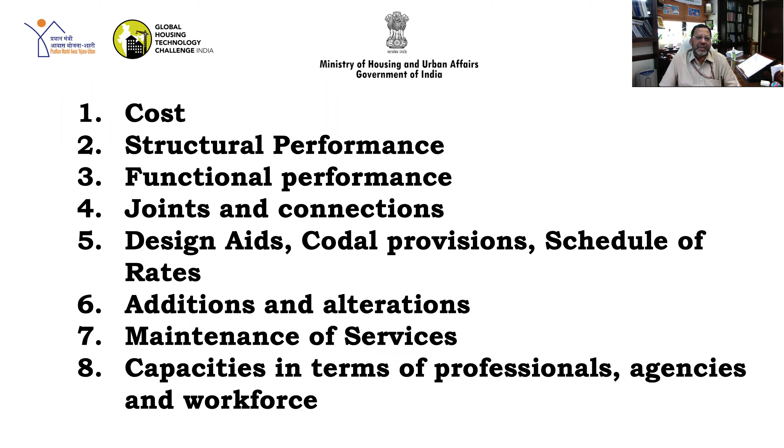But before that, let me just tell you the Lighthouse project at Lucknow is being implemented with 1040 houses in S plus 13 configuration, and the technology used is a hybrid one, where steel structural frame with stay-in-place PVC wall form system is being used. The plot area is 20,000 square meter and the total project cost is 130.90 crores.

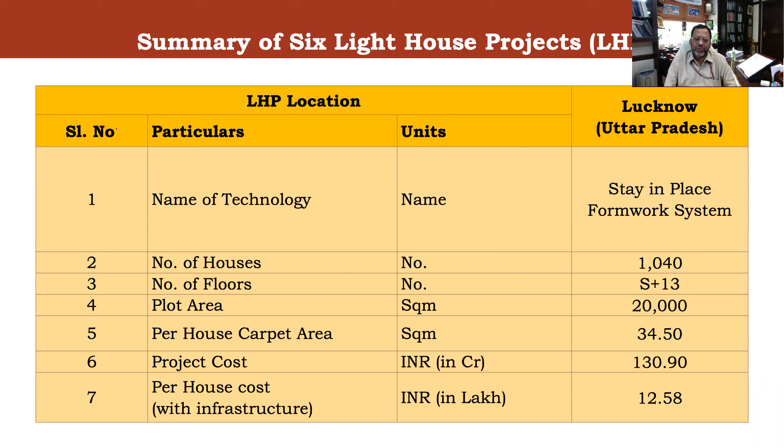The question about cost, because we are using steel structural system plus PVC wall form, naturally comes into mind whether the cost here is cheaper than the conventional cost of construction. And when we are saying the conventional cost of construction, it means if the same thing is done with cast in situ RCC frame construction and brick infill walls.

So if I have to give you the tendered cost, the LHP at Lucknow was awarded at per flat cost, including infrastructure, at rupees 12.58 lakh. And if we compare it with conventional technologies cost, it is 15.38 lakh. So with conventional, it comes to 15, and here we are getting around 13 lakhs, which is 18% cheaper than the conventional cost.

Besides that, the technology being used is fast, cost effective, makes use of less energy, environment friendly, resource efficient, and waste is minimized. It is sustainable as well, and you have a clean dust-free site, because it is a drywall construction kind of thing.

Now at the same time, let me also tell you that cost depends on a number of factors, such as the size of the project, location, geoclimatic region, the foundation, means soil strata. If it is black cotton soil, naturally you have to invest more on foundation. Then availability of materials: if you have a factory nearby of PVC wall form or any drywall, then the cost may come down, because you will cut down the transportation cost and other things. Accessibility of site is also very important.

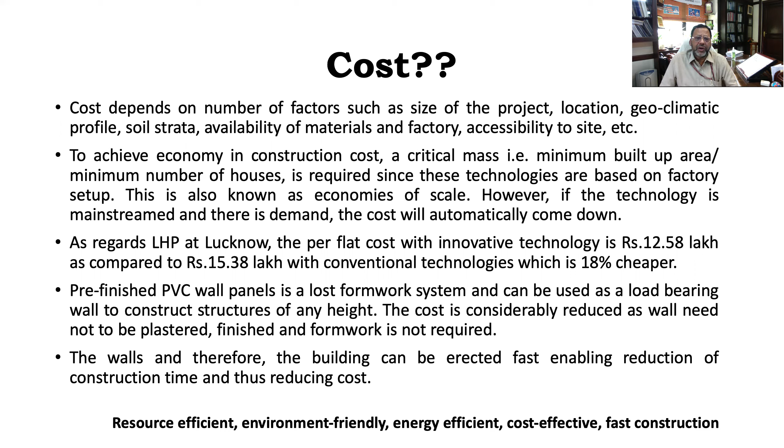So these are the advantages, and as per this project, the cost is 18% cheaper. Also, this technology is resource efficient and environment friendly. Next question that comes to mind is the structural performance, because we are using innovative construction technology, and the RCC frame construction is time-tested, proven. Let me also tell you that PVC wall form is a proven, demonstrable technology elsewhere in the world.

And so here also its structural performance is superior to the conventional construction, because these panels are made in the factory, and then later you can fill it up depending upon your structural requirement. You can fill it up with lightweight concrete or normal concrete. This will ensure desired structural performance. Because you are filling it with concrete and then connecting it with the boundary elements, you get better structural performance. Also, PVC wall forms are tested and proven for flexure, shear, and other loads.

As I told you, these are designed as per your requirement. So depending upon the project requirement and the loads coming, these PVC wall panels can be designed and later manufactured. The thickness you require, the cut length you require, the width you require, all those can be decided based on your structural design. Other advantages are better structural strength, as I told you. It can take flexure as well as shear load. Durability: they are durable because they are made in the factory.

Ease of construction. This formwork being a rigid PVC component, it does not corrode, it does not chip, it cannot be stained, and it is resistant to UV, bacteria, and fungi, thus ensuring long life of the structure. If we compare the life, the PVC wall form life as claimed by the manufacturers is 50 years. Also, it is very useful as a wall panel in coastal areas.

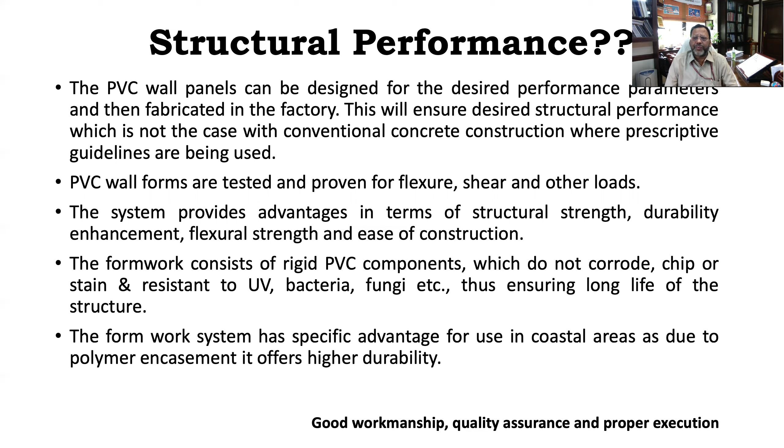That is one thing. Secondly, good workmanship and quality assurance. Although you will get all the panels tested from the factory, when you start erecting them and aligning them, you need to do it as per specification with good workmanship and assure the quality as well. These three things are important for superior structural performance. Next question comes about the functional performance. So as I told you in the last slide, in between it's hollow.

PVC wall panel of 100 mm or 160 or 150 mm, depending upon your application, is hollow, and that hollow portion can be filled either by concrete or by lightweight concrete. In this project, we are filling it with lightweight concrete, and lightweight concrete doesn't have aggregates. It can be done with foam, or otherwise you can use cement, fly ash and aluminum powder to create foam. So voids are created. Those voids help in thermal insulation.

Because these panels are made in the factory, they have advantages in terms of durability and weather resistance. Another advantage: once you have thermally insulated walls, it will reduce the energy demand of your building. And once you reduce the energy demand of your building during its service life, the overall life cycle cost will be minimum. So that is also very important.

Another important thing is that it's a pre-finished wall. Pre-finished wall means that you get the wall from the factory as per your desired parameters. So whatever color you want, you can get those color options from the factory. So you don't require plaster, you don't require anything else, and these walls are aesthetically pleasing, with a top class finished surface in different color options. So that is another added advantage of these wall panels.

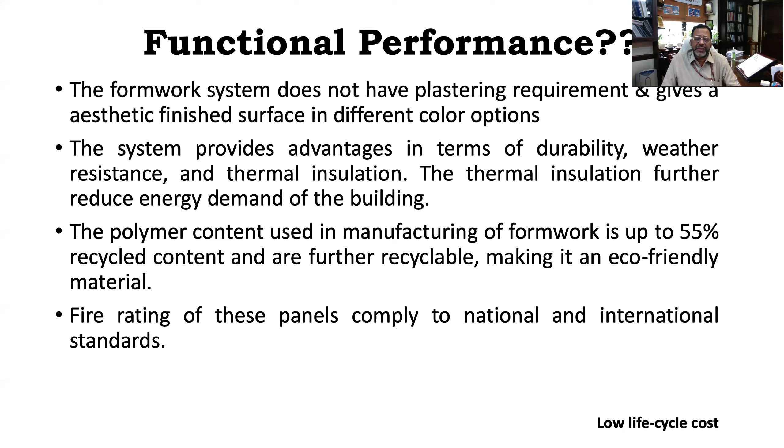Fire rating: as per the manufacturer certificates, the panels come in different fire ratings, 1.5 hours to 2 hours. And as I told you in other lectures as well, there is no compromise as regards fire rating. So fire rating of these panels needs to be as per national and international standards.

Joints and connections are pretty simple here, because wall panels can easily be connected by slide and lock arrangement. Secondly, once they are erected, they are hollow and have cavities, and through those cavities you put horizontal and vertical reinforcement. So all wall panels are connected with horizontal and vertical reinforcement, and later you fill it with concrete. So it acts as a monolithic shear wall, pre-finished with PVC skins on both faces. So it's a pre-finished shear wall construction. So that is the advantage.

So as far as the wall is concerned, it is good to transfer the load monolithically. Structural integrity of walls is achieved because of this kind of arrangement. Now, another thing is, how do we connect these walls with the existing structural system? It can be RCC or it can be a steel structural system. In our case, it is a steel structural system.

When you are using a steel structural system, all beams and columns can be connected through anchor bolts, plates, and dowel bars. If you are using RCC, then it is slightly simpler, because you can cast the concrete of beams, slab, and this together. In a steel structure system also, if we use a deck slab, then the concrete screed is cast with reinforcement going into the beams. So you can connect all the structural elements at the slab level, thereby ensuring rigid diaphragm action. And that rigid diaphragm action is very important for ensuring seismic resistance.

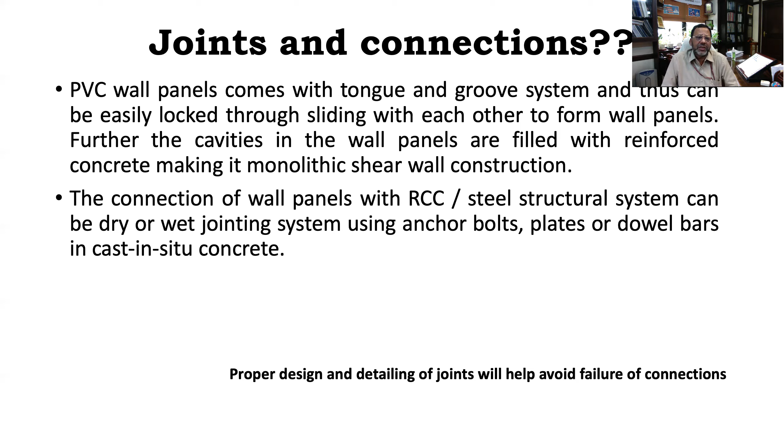The length of the joint, the dimensions of the plates, if you are using cleat, the dimensions of the cleat, then what should be the bearing, all those things need to be properly detailed so as to avoid failure of connection, because a poorly detailed strong connection will not help. Similarly, if you don't detail it properly and if you have designed it properly, that will also not help and lead to failures. So joints and connections, there are absolutely no problem when we are talking about PVC wall forms.

Design aids, if we talk about, these PVC wall forms can be easily modeled, because being a concrete wall, it can be easily modeled. Also, these innovative systems have their own software, so you can always use that software. But always remember that this software is not tailor-made for or synced with Indian standards. So you can put your parameters as per Indian standards, do the analysis, and then use any standard structural design package to design your walls and, of course, the structural system.

Remember that in absence of Indian standards, the international standards can always be referred, and it is being advocated by BIS firmly. And the decision has to be taken by the project in charge: in the absence of an Indian standard, can we use an international standard?

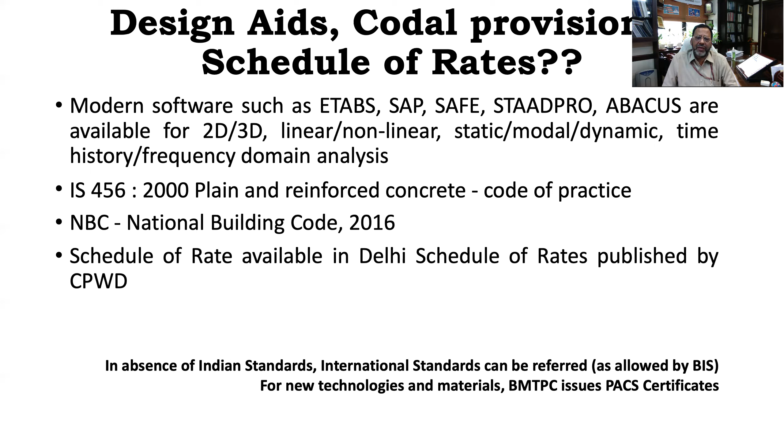The answer is yes. Also, PVC wall panels are certified by BMTPC through a scheme called Performance Appraisal Certification Scheme. BMTPC is authorized by the Government of India, and the BIS clearly states that new construction systems and new sustainable building materials which are not covered in the code can be certified by BMTPC through PACS, and PACS is a kind of pre-standard. So before entering into the BIS or Indian standard, PACS is valid and can be used for certification purposes.

There are standards which are used for designing, analyzing, and fabrication of a steel structural system. The most important code for loads is IS 875, which gives in detail the dead loads, live loads, densities, load combinations, and other things. And for earthquake, we have IS 1893. Always remember this 1893, and please use that code whenever you do any design, irrespective of the type. And then for steel, we have IS 800. It is rewritten; now we have the limit state method for design in IS 800 as well. So for steel structural systems, you can use IS 800.

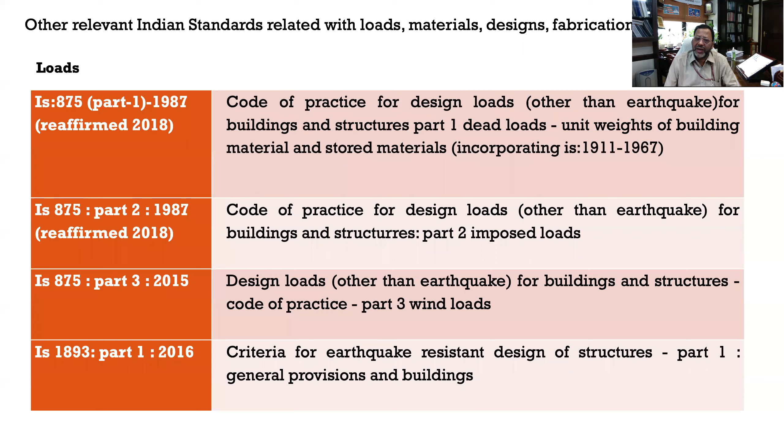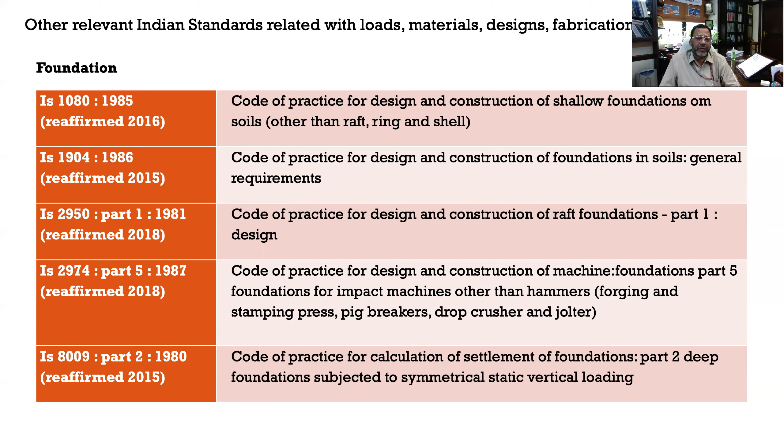And if you are using an RCC frame for concrete, then you can use IS 456. That is the most important code for RCC. Apart from this, for foundations, if you're using conventional, there is IS 2950 for raft. Then for shallow foundation, there is IS 1080. Then for pile also, we have a separate code. For machine foundation also, we have a code. So why I'm showing you all these codes: in addition to the code for that new technology or certification, you need to use these codes as well, if you're using concrete, steel, and conventional foundations.

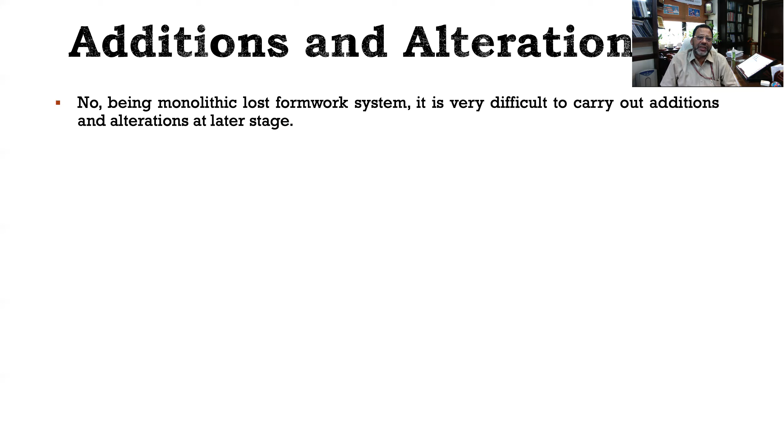Additions and alterations, sorry, cannot be done here because it is again pre-planned, and PVC wall forms are factory-made, pre-finished walling components, so it will be very difficult to do additions and alterations. But it is not sacrosanct that you can't do it. You can do it with the help of experts, but my advice is that it is difficult.

And maintenance of services, same thing here: in stay-in-place PVC wall form, everything is pre-planned, and all MEP services are concealed and installed before pouring the concrete. So at a later stage, it is difficult. So what is my advice? Preventive maintenance. Regular preventive maintenance means checking of lines, conduits, clogging.

Most of the time, let me cite the example of a roof. If you don't clean your roofs, there is clogging of drains, and during rainy season your drains are clogged. Clogged drains will lead to leakage of water. So it's a very small thing: before summer, before rainy season, if you can clean your drains, if you can remove the leaves and other things, dirt, then it's a very small intervention, but that will help you prevent ingress of water during the rainy season.

So similarly, there are procedures for regular preventive maintenance, and all these new technologies come with a manual on how to do this kind of preventive maintenance of services, and in case of any failure or leakage, how to carry out maintenance. It is difficult, but it can be done with the help of experts and skilled workforce.

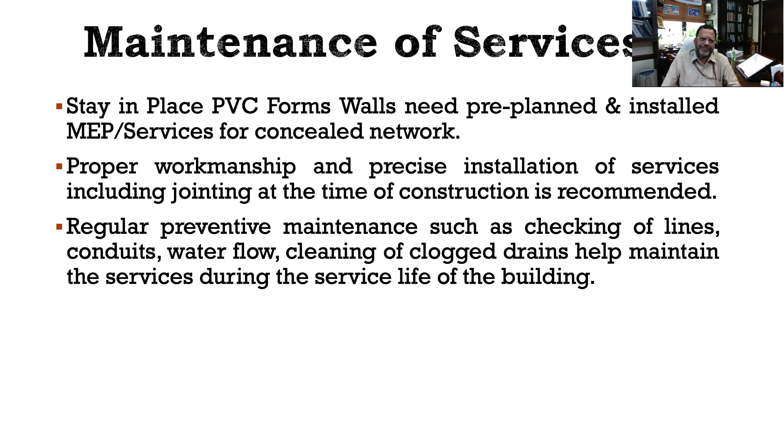Capacities, yes, capacities are low if we talk about PVC wall forms, and that is why most of the projects are given on a design and build basis. But concerted efforts are being made at the Ministry of Housing and Urban Affairs level, and along with BMTPC, we are constantly trying to train the professionals, including students of architecture and engineering. We are also running a course, NAVARITIH, in association with the School of Planning and Architecture, through which we are building capacities of professionals and architects. Also, these lighthouse projects, as you know, are live laboratories, and this Technograhi e-module is started with this purpose only, so that you understand the nuances of these technologies, and later on you can use these technologies.

Also, our aim is to get these innovative construction technologies included in the academic curriculum of our universities and technical institutions, so that they become part of the education curriculum of engineering and architecture.

Also, if we talk about agencies, as of now, there are very few agencies who work with this stay-in-place PVC wall form and have the requisite experience to execute large-scale projects. Very few agencies, but in the wake of the Atmanirbhar Bharat and Make in India call given by the Honorable Prime Minister, a whole lot of startups, industries, young entrepreneurs, young engineers and architects are coming and joining the bandwagon of these new construction technologies as technology providers. So I'm pretty sure that in times to come, when these technologies are mainstream, we will have a number of agencies, and there will be healthy competition amongst them.

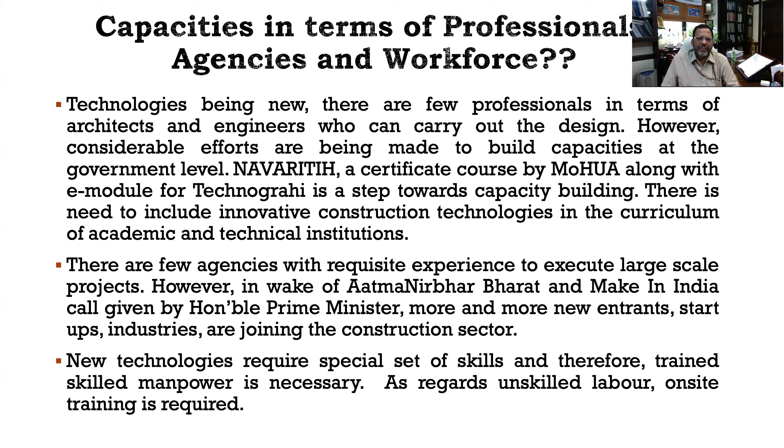Always remember that whenever we work with new technologies, you need to impart training to the workforce as well. So you just can't use unskilled labor as it is, because you have to properly lay these walls. These walls are made in the factory, then they need to be transported, erected, and hoisted in a particular fashion. So all unskilled workforce require a little bit of on-site training, and they can be easily trained. Similarly, whenever you use any innovative technologies, trained skilled manpower is necessary, and we are also making efforts to train the existing workforce. And there are agencies that first impart training to the available workforce and then start the projects.

I hope I'm able to cover some of the queries and misconceptions which we have in our mind whenever we talk about new technologies. I hope it will serve your purpose for the time being.